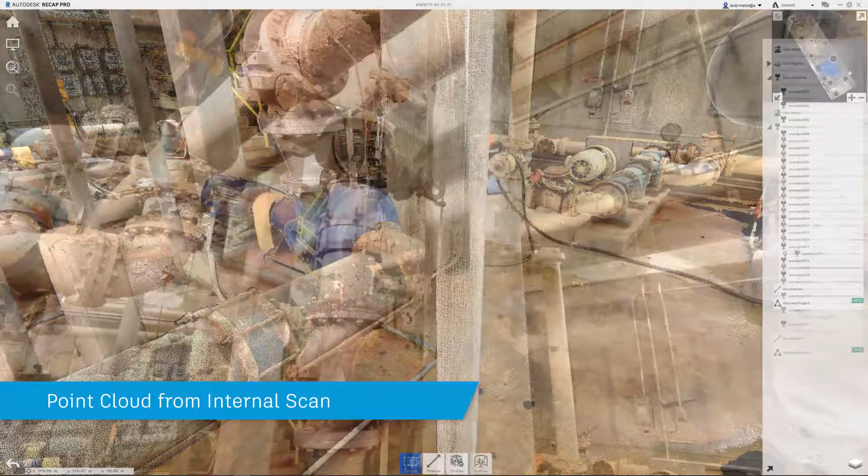In order to create an accurate model of the existing conditions, a scan of the pump house internal layout is undertaken and a point cloud created ready for feature extraction.

To maximise the benefits of team cooperation, a BIM 360 design project is set up to enable team collaboration for Plant 3D, Revit and Navisworks.

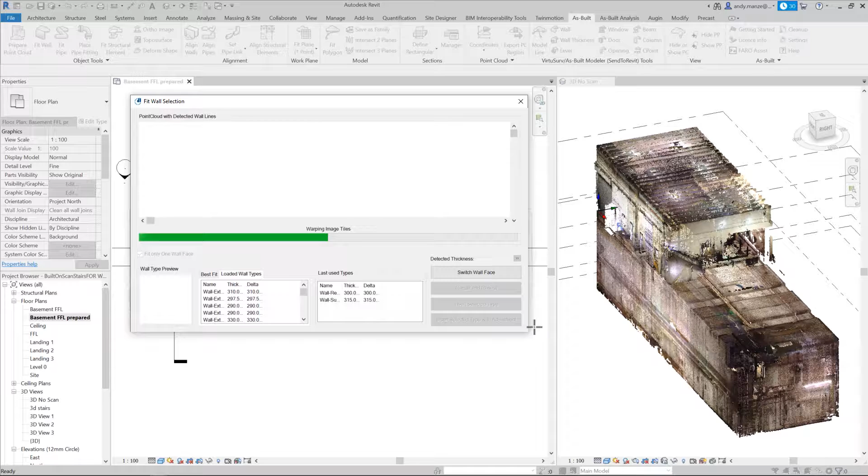The next stage is to establish an accurate model of the existing pump house structure. This is carried out in Revit using feature extraction tools to first identify the positions of the walls and then the columns from the point cloud data.

This process can continue with other parts of the structure until a full replica of the structure is achieved, and we can then move on to the next process, which is the extraction of piping features in Plant 3D.

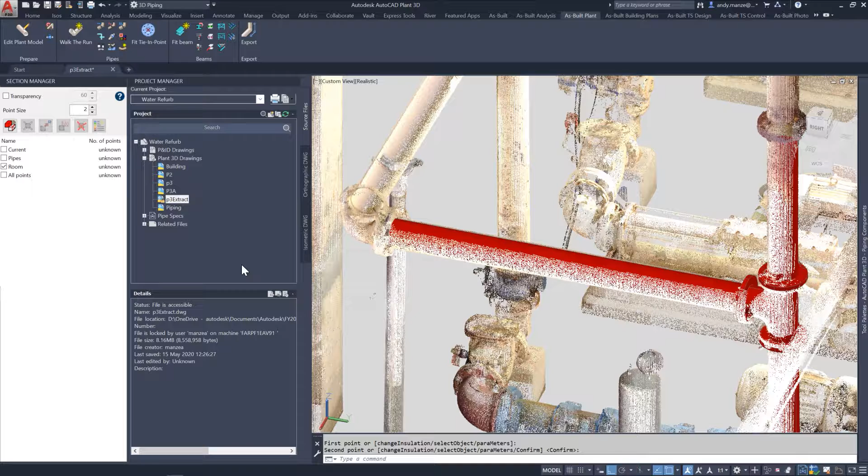Extracting the piping follows a similar process. By identifying points within the point cloud, the piping positions and sizes are automatically detected, as are the piping branches and fittings. Intervention into the automatic processes is also possible to resolve any ambiguity and to determine which piping branches to follow, as it may not be necessary to model piping not relevant to the project.

However, all the equipment and piping could be extracted in order to create a digital twin for ongoing maintenance purposes.

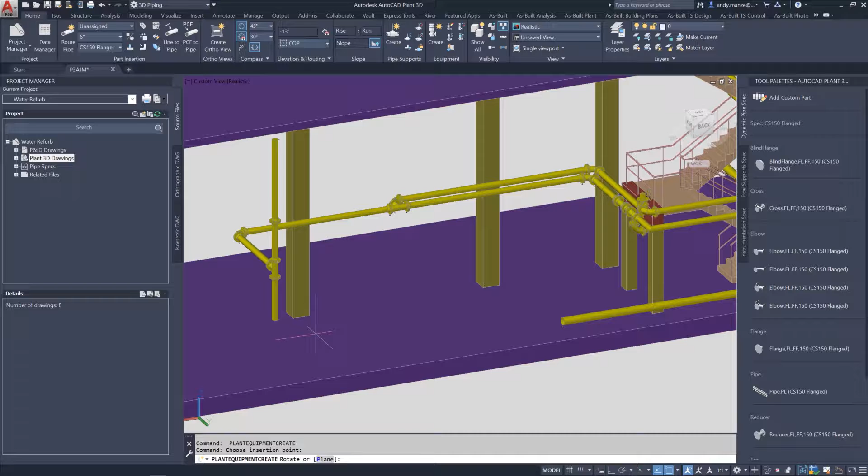Now that the existing conditions have been accurately established, the process of creating the new expanded pump array can begin. Firstly, using the Revit model as a reference, defining the new pump positions, and then by creating new piping runs to connect the new pumps into the existing piping system.

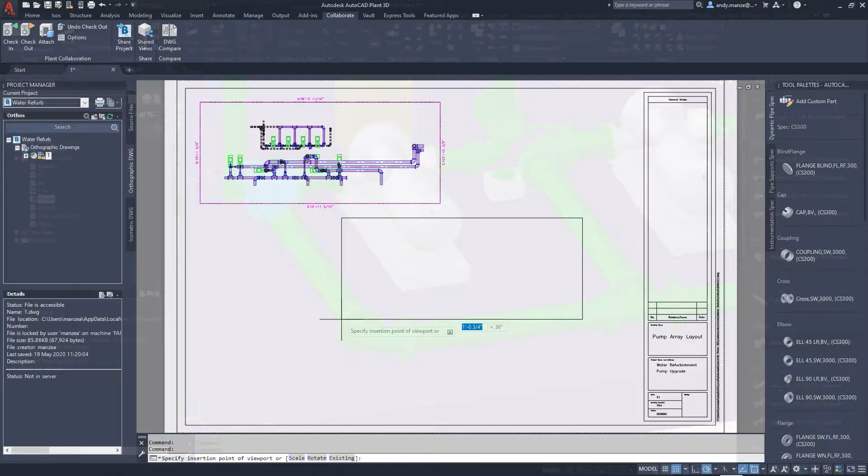The documentation phase will now follow the successful creation of the new expanded pump array. Firstly, with the creation of the necessary ISO and ortho drawings, together with the bills of materials, all of which, including the model itself, are synced to BIM 360 Design.

It is also then possible to export part specifications and quantities for ongoing maintenance operations.

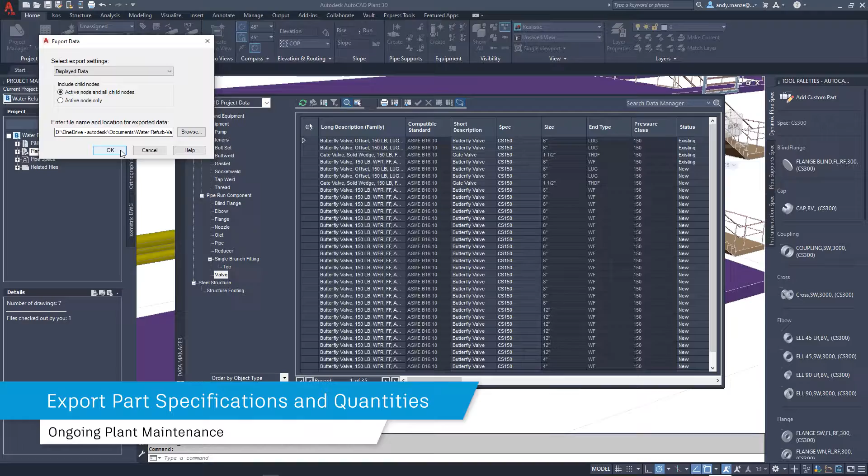An assembled model in Revit can then be produced in order to create documentation relevant to any structure changes that may need to take place to house the new system.

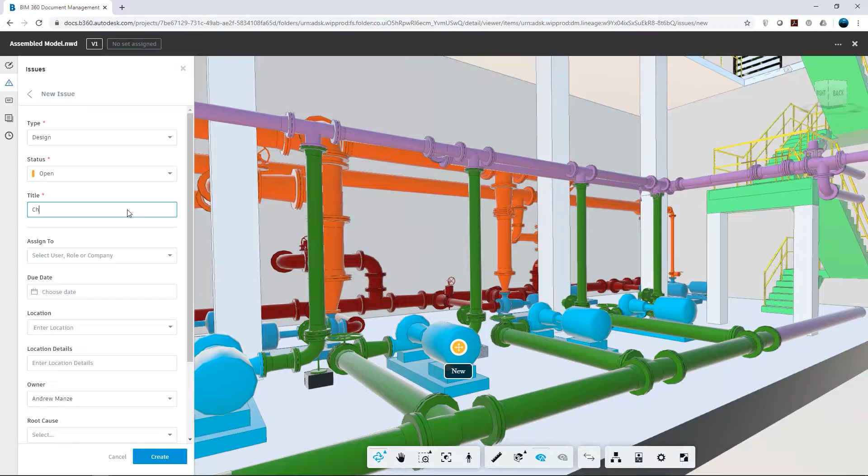The combined model can then be checked in Navisworks to identify any clashes between piping and any new or existing structure. During the review process, any issues that have been identified can be assigned to individuals to resolve in BIM 360 Design. Once assigned, these issues can be received and responded to in both BIM 360 Design and Navisworks with bidirectional communication to maximize work efficiency.

At any point in this process, an InfraWorks model can be created to produce compelling visualizations, as well as enabling the tracking of progress of the building and equipment creation, together with the many other various disciplines as they progress within the wider context of the project environment.